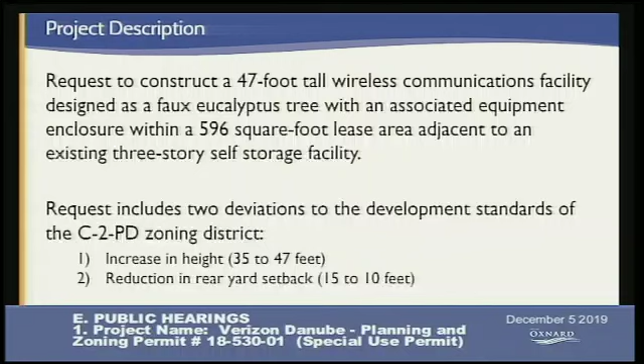Thank you, Vice Chair Chua. Members of the Planning Commission, the item before you this evening is the Verizon Danube project, known as PZ 18-530-01. The applicant is also here tonight. The request is for the construction of a 47-foot tall wireless communications facility that will be designed as a faux eucalyptus tree. It will also include associated equipment within an enclosure, all within 596 square feet of lease area. That will be adjacent to an existing 3-story self-storage facility.

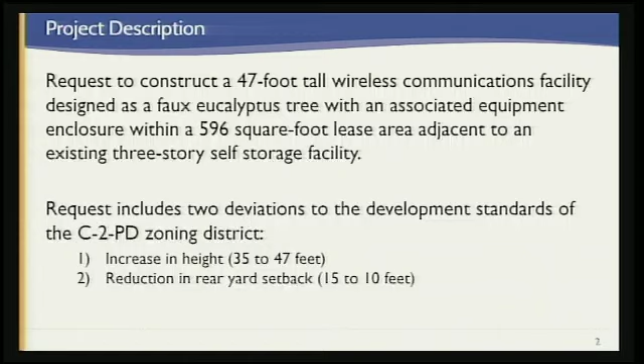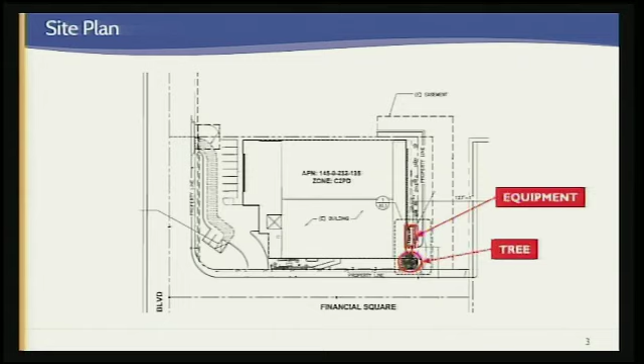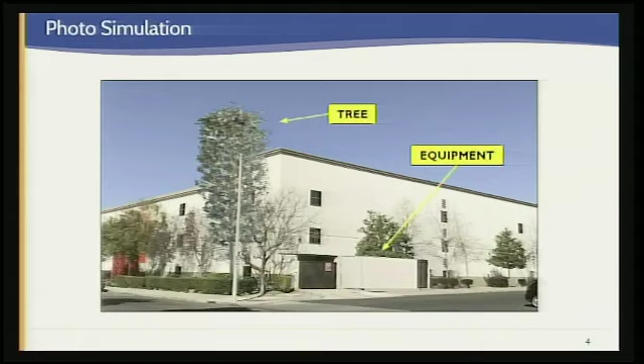The request also includes 2 deviations to the C2 PD zone standards. The first is an increase in height from 35 feet to 47 feet. The second is a reduction in the rear yard setback from 15 feet to 10 feet. This is a site plan of the proposed facility. The faux eucalyptus tree would be located in the southern corner of the property, and the related equipment enclosure would be located just on the other side of a trash enclosure. This is a rendering of the proposed facility. Note the faux eucalyptus tree and also the equipment enclosure.

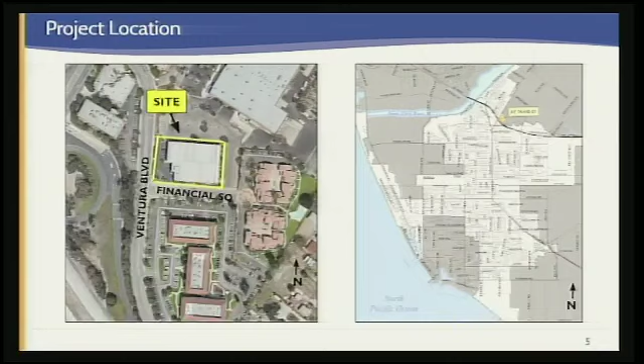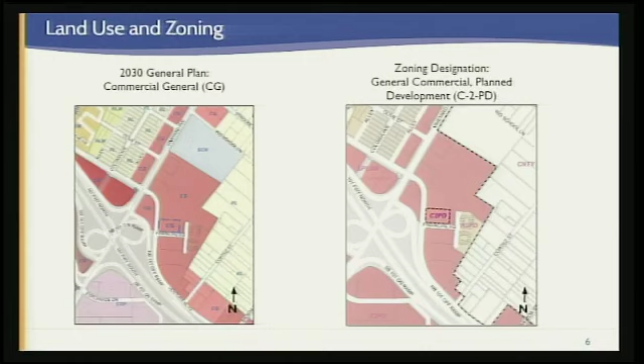The site is located next to the El Rio area and is largely surrounded by commercial development. The facility is consistent with the general plan designation and the zoning district standards. That analysis is detailed in the staff report. Here's an aerial view of the site. Again, the facility is located in the bottom right corner of the property.

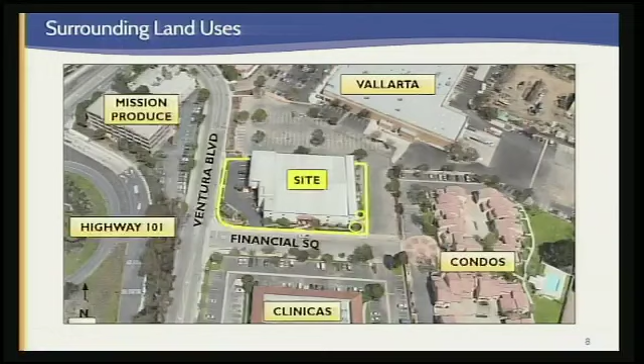In 2003, City Council approved a special use permit for the self-storage building. The self-storage building was constructed to be 35 feet tall, which is the maximum allowed height in the C2 zone. To date, no changes have been made to the building.

In 2015, the Planning Commission granted a special use permit for a 44-foot tall wireless communications facility. That facility was designed as an architectural feature on the rooftop. That facility was never constructed, and subsequently the SUP expired.

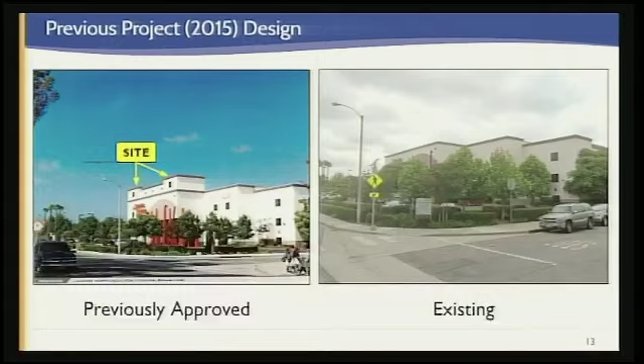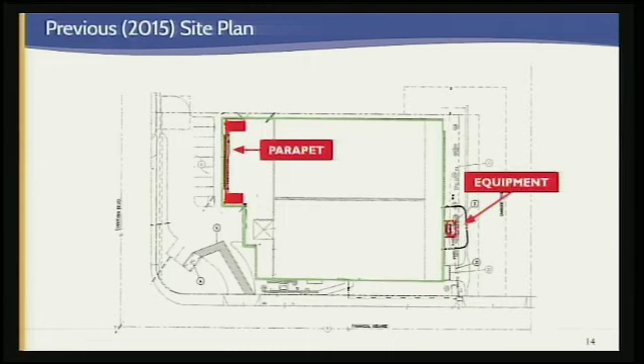In 2015, the facility was proposed as a parapet wall that was located on the front of the building along Ventura Boulevard. The related equipment was located at the rear of the building, very close to where it is currently proposed. In 2015, the facility was proposed as a parapet wall. The wall was approximately 9 feet high and 80 feet wide.

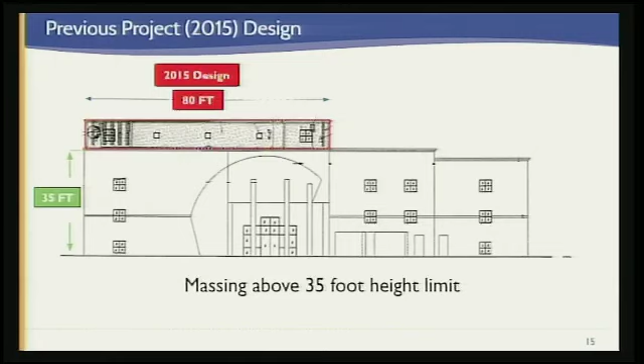That design included a request for construction above the maximum height allowed in the C2 zone. At the time, that proposal also included the equipment enclosure located behind the building, very close to the current proposal.

However, that project was determined to be infeasible because the roof of the building would not support the proposed facility. The roof, in order to support the project, would require substantial improvements, and thus the design was prohibitively expensive.

The current proposal includes 2 deviations from the C2 zone standards, the first being an increase in maximum allowable height. The applicant is requesting that increase so that the signal can project over the adjacent building. The building is 35 feet tall, and the proposed facility is the minimum height required to clear the building. Thus, staff recommends you approve the additional height.

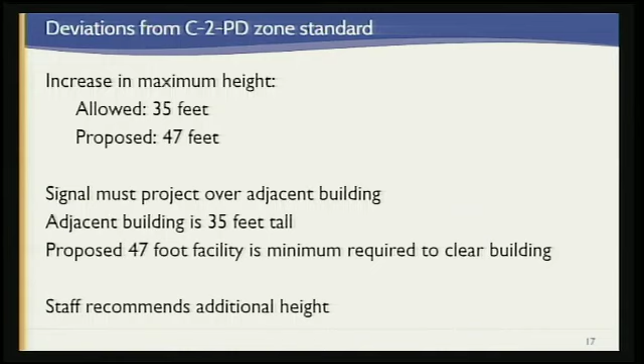The second deviation is a reduction in the rear yard setback. The applicant requests this because the proposed facility requires a caisson, and the caisson cannot be located too close to the existing building to undermine the foundation. Therefore, staff recommends you also approve the reduction in the rear yard setback.

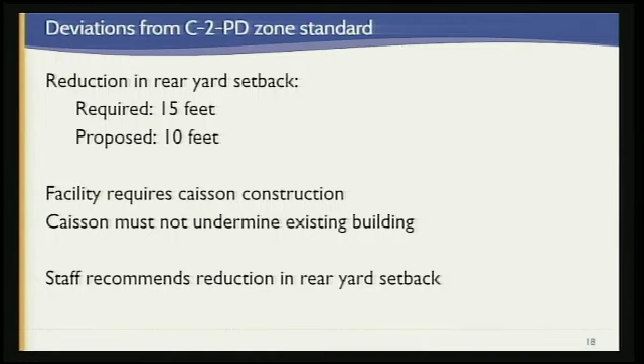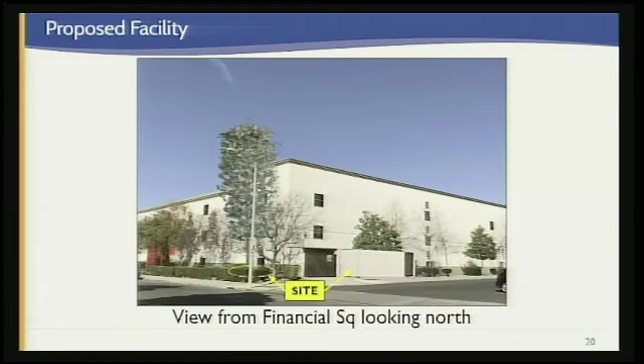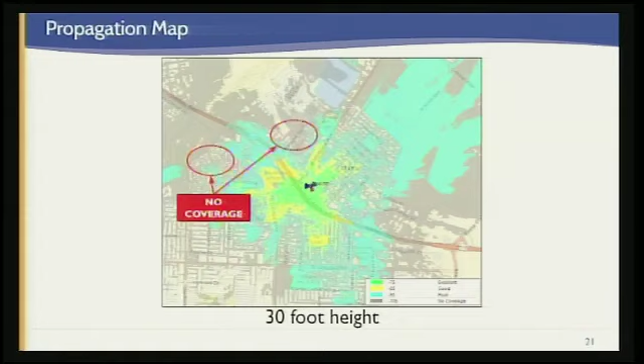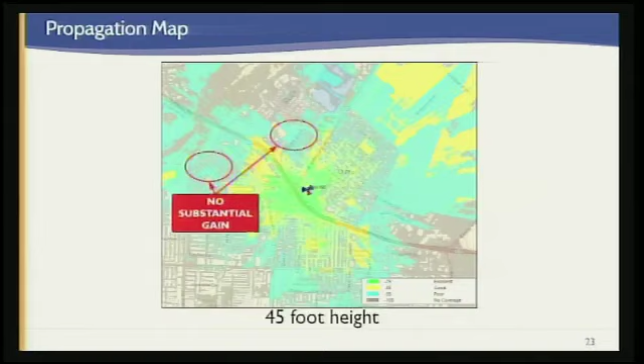As it is proposed, the facility is prominently visible along the Financial Square right-of-way. The proposed facility would be a faux eucalyptus tree, which would clash with the adjacent magnolia trees along the existing building. The question for your commission this evening is how to weigh the strict application of the setbacks and the height, and also minimize the adverse visual impacts of the proposed facility.

Thus, staff is recommending that the proposed facility be located behind the building, approximately 50 feet north of its proposed location. The recommended location would preserve the existing landscaping along Financial Square, and the facility would not be as prominently visible from Ventura Boulevard. Note that there is a condition of approval which would allow the planning manager to determine the exact location of the facility.

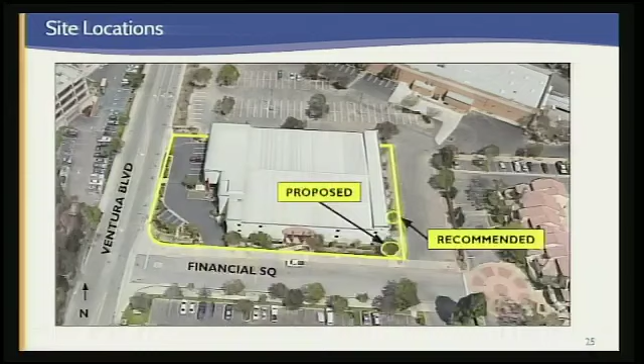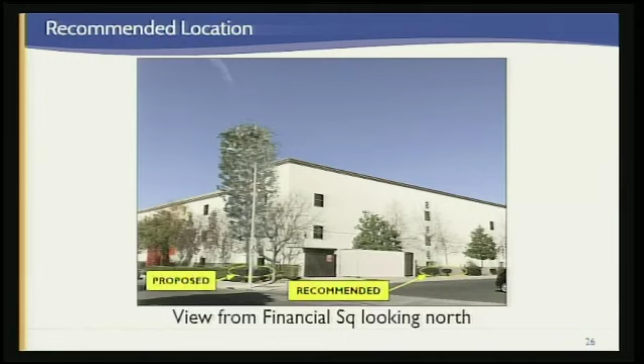This photo shows the proposed location and also the staff recommended location. Note the recommended location is located behind the building. This is a different view showing the proposed location and also the recommended location. This is a rendering of what the proposed location would look like. Note the existing landscape tree would be preserved and the faux eucalyptus tree would be located behind the building.

The proposed development would be subject to several conditions of approval. This slide showcases some of them. Note condition of approval number 24, which requires the facility be located behind the existing building. Some other conditions include the maintenance of the facility. The permit would be valid for only 10 years, and the facility must comply with all FCC regulations.

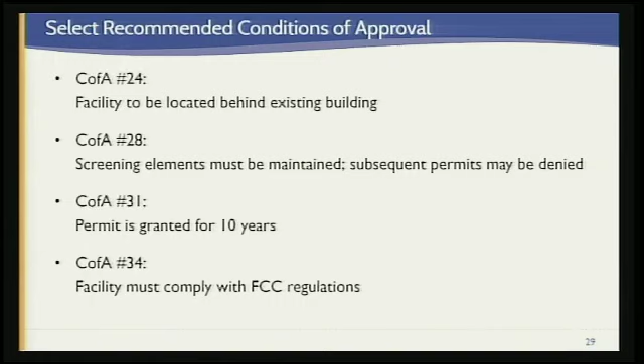Since the project is new construction within 596 square feet of lease area, and the project does not trigger any thresholds within the city CEQA guidelines or exceptions to the exemptions, staff finds this project is exempt from CEQA pursuant to section 15303 and recommends your commission find this project exempt.

The site is located within the El Rio neighborhood. Therefore, this project was presented to the community workshop back in April earlier this year. At that workshop, there were no public comments regarding this project. Based on the previous discussion, staff recommends that your commission find this project to be exempt from CEQA and approve the planning and zoning permit number 18-530-01, subject to certain findings and conditions.

That concludes my presentation. At this time, I want to draw your attention to the errata memo, which you should have received just the other day. This memo calls out an attachment which was not included in its entirety to the staff report. I'm available for any questions. The applicant is also here. Thank you, Mr. Dabrowski. Thank you for your presentation.

I would like to acknowledge the presence of Chair Frank. Yes, so it's too bad our traffic engineer is not here this evening, because maybe he could tell me why the number 2 lane on southbound Victoria is closed at Gonzales. So everyone is merging into the number 1 lane. Of course, there's no advanced traffic advisory when you're coming from Ventura to advise you that the street is going to narrow ahead and this traffic is going to take you 1 hour and 12 minutes to get from Victoria and Ralston to Victoria and Gonzales. And that's what it took me. So I'm sorry that I was delayed.

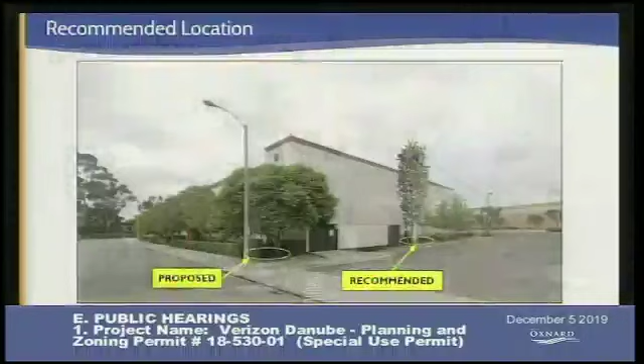Vice Chair Chua, in the slide shown here, the proposed location would require the removal of a magnolia tree on the corner of the building. The recommended location would also require the removal of a tree. Right. However, the trees in the rear of the building are not as large and are not as screening the building as the landscape trees on Financial Square. Okay, so it's more accurate to state that the landscaping will be touched, but it's got less impact than the proposed, correct? Yes, that's correct. Okay, okay.

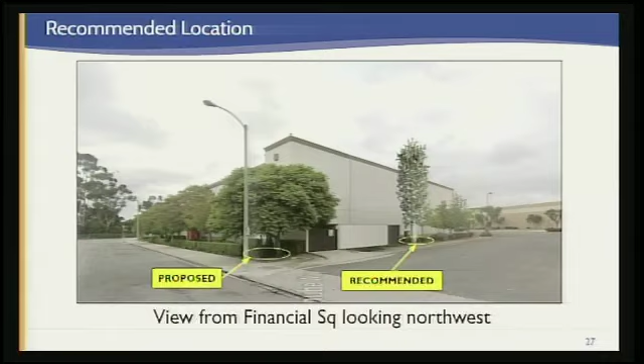So on condition number 24, in follow-up to Commissioner Chavez's question, you know what, maybe this is a question for the applicant. So if nobody else has a question, go ahead, please. Commissioner Chavez. Just going to piggyback off of your questions in regards to the trees. How many trees total are going to be taken out based off of the applicant's proposal and the city's recommendation? Commissioner Chavez, the applicant's proposal would require the removal of one tree. The staff recommended location would require the removal of one tree. So the net total is the same.

Now, is there any plan to relocate that magnolia tree, or is it just a complete removal from the project? As proposed, the tree would be removed. And what about the city's one tree? Does that plan on being relocated or just completely removed? Again, that tree would just be removed. All right, thank you, Mr. Vice Chair. Okay, just one follow-up question.

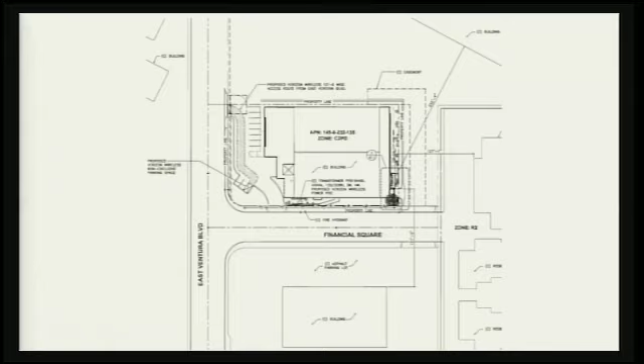Good evening. I did prepare a quick presentation for you tonight. Mr. Deborowski pretty much covered quite a few of my slides, so I may run past a few quickly if that's okay with you. Let's see if I can get this to work. There we go. So again, this is just the location. This is the frontage of the public storage building at the corner of the front area of the building, just to give you a quick photo. To orient ourselves, again, we're off of Financial Square. We're locating in the rear setback area. This is the proposed location. It would be right behind that light standard on the corner of the building for the new mono eucalyptus tree. And again, the equipment would be adjacent to the trash enclosure.

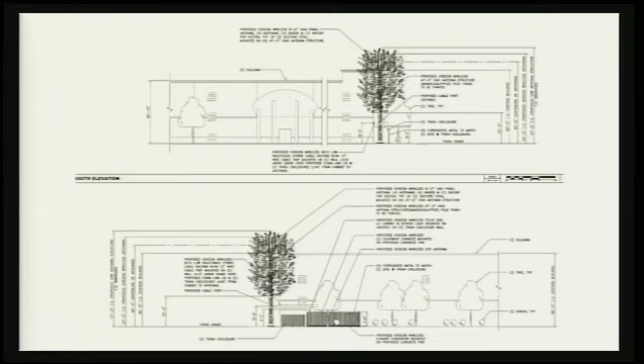Currently, does this have a pointer on it, Jay? Oh, very good.

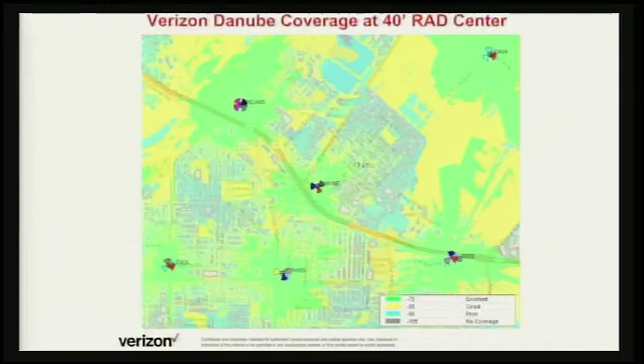This is with the coverage at a 40-foot rad center. And the 40-foot rad center means that that is the middle of the antennas, and that's where they project their propagation from, from the middle of the 8-foot antennas. And this is just a standalone, giving you an overview of what kind of coverage just this facility would provide by itself.

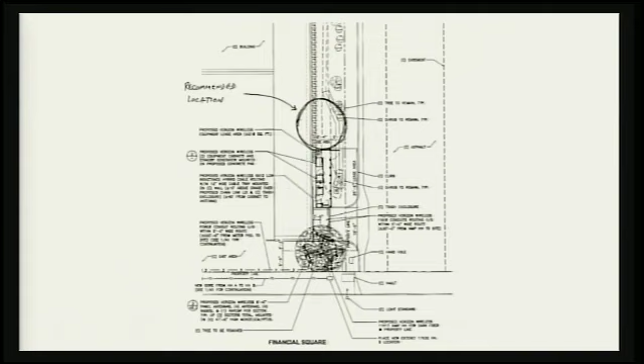Again, this is the staff's recommendation of the proposed project and the recommended location that we received. And this to the left there would be the area. If we moved it back, that's what it would look like. There is that dotted line right here, which is the footing of the building. This project, due to the 2016 building code and the structural and wind loading that we need to have, will have a 5'6" circumference for a footing for structural. So we would need to be off of that footing, and we would have to move out further, and we would be overhanging off of the existing property line at that location.

In addition, because we're not on the corner, our antennas would be right on top of the existing building. The way that these networks and these antennas work is that they propagate a lobe. So they come out like this and they go like that off of the antennas. This sector right here would not be getting the beneficial service as it did if we were on the corner, because on the corner we have no obstructions. On the recommended location, we would be obstructed from the building on the lower lobe, and it would degrade the facility's propagation.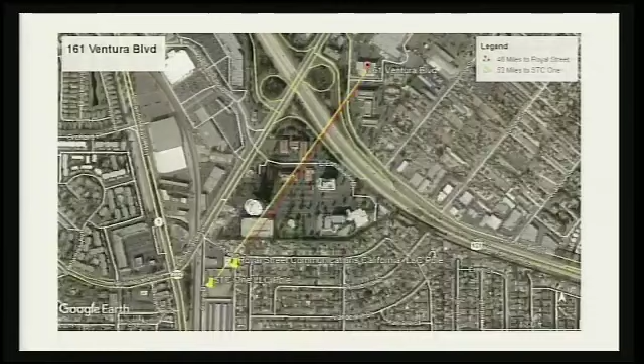These are just some other facilities that are currently other towers in the area that we did look at, but they are further away, and also the coverage in that area is okay now, and they don't need to be filled. So that's why we were looking for another standalone project. Generally, we like to go out and look for a co-location facility if we can, before we go out and build a new facility. But at this time, I am seeking the proposed project that was filed due to the coverage ability.

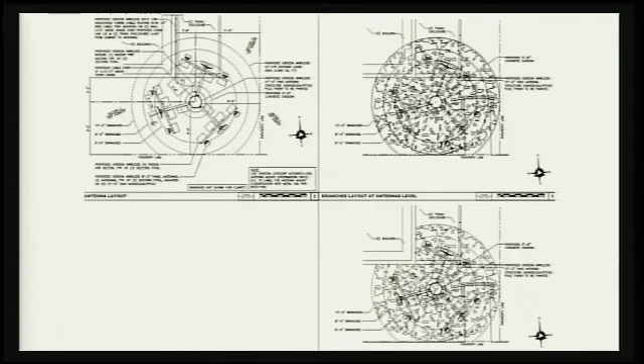Any questions from the commissioners? I just have one. Go ahead, Commissioner Dorsey. If you could go to, I think it was the 4th slide, it kind of shows the proposed look. Yes, that one. When was this photo taken? I'm trying to determine because on this photo, the tree in question has no leaves, and our package is full. I believe I was looking at this today when I was putting this together, and it was taken in February. Okay. So it was February of last year.

Okay, because that looks like a totally different tree than what's on page 11 of staff's presentation. Right, I think it's just a different season. I'm not too familiar with magnolia trees, if they do drop their leaves or not, but this was taken in February.

Okay, all right, thank you. Thank you, Vice Chair. Anybody else? Question of the applicant, Commissioner Chavez.

Thank you for the presentation. I had asked staff in regards to, maybe you mentioned this, but if you can just repeat it again, the reasoning why 4 years ago it was okay for a 40-foot and now you're requesting a 47? The approval height, sorry, in 2015 was for a 44-foot top of structure. That would be the same top of antennas that we're looking for here. The additional 3 feet is for the additional foliage on top of the tree. So it just doesn't come up like that, it comes up and looks more like a tree. So that's the reason for the additional 3 feet that we're requesting.

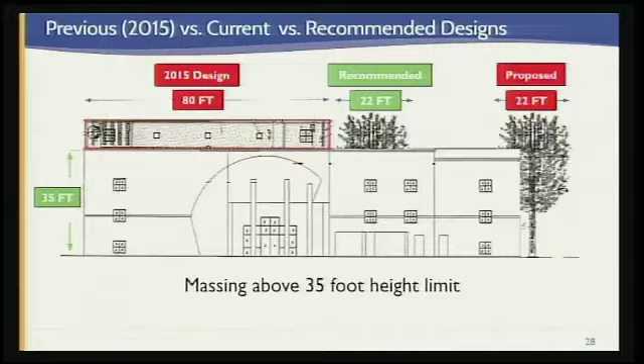If I may, I do want to point out that at that location, the branches would overhang the property line. Well, trees overhang things all the time. Show me where it would overhang. Maybe the photograph, the overview, the top view. Mr. Vice Chair, if I may, I've got one here that'll work. Hold on, please. I'm sorry, I'm in the middle of a question. I want to show you this one here.

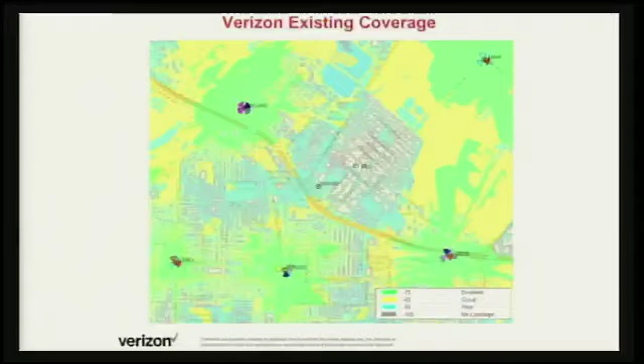Okay. So this right here basically shows that we're encroaching on the foundation footing to keep it within the property line. This is the outside of the foundation; we're going to have to move it at least 5 feet, out to here, which would push us out here. Okay. I just wanted to be certain, because we will be out of the property line and into the right-of-way. I understand, but that's with a eucalyptus tree that you're proposing.

How about a tall cypress tree? How about a different tree? No palm tree, please. No, I'd never say that. Okay, thank you. But aren't there other trees? I'm not a tree expert.

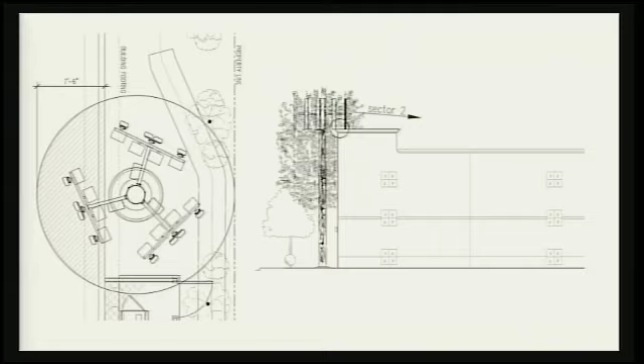There are definitely other trees. There's the monopine tree. There's a new mono elm tree that just came out. But generally, the arrays and the sectors are standard. It can be designed where the branches are really close to the antennas, but you're missing out on the aesthetics of the tree that way. But yes, it can be designed that way. Well, if we're concerned about the aesthetics, why aren't we looking at attaching it to the face of the building and covering it up with FRP?

It's been done before. It has been done. It just reduces the coverage area. Not the coverage that you want, right? Yes, it reduces it, not necessarily the need. It reduces it by 8 feet at this area. Okay. I don't know, you know.

I'd really like to see a workup of the recommended location. I think that's something important that we should look at. I mean, the dilemma or the issue I have here is that we have a recommendation from staff to move it to a location that hasn't been studied at all. So I don't know, I mean, I want to see all the possible options before we vote on something like this. We're not sure if there's going to be conflict on any facility as far as staff's recommendation is concerned.